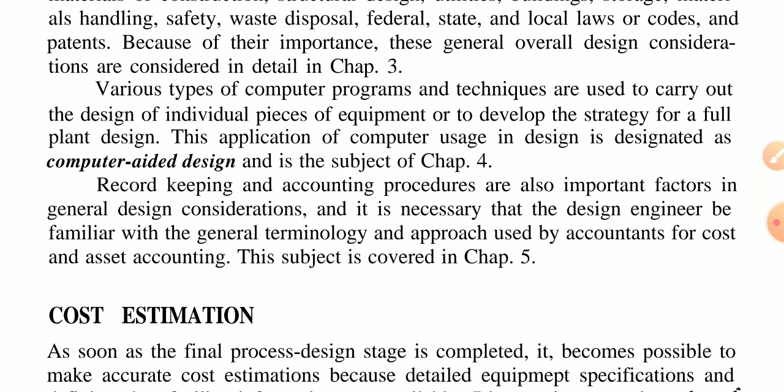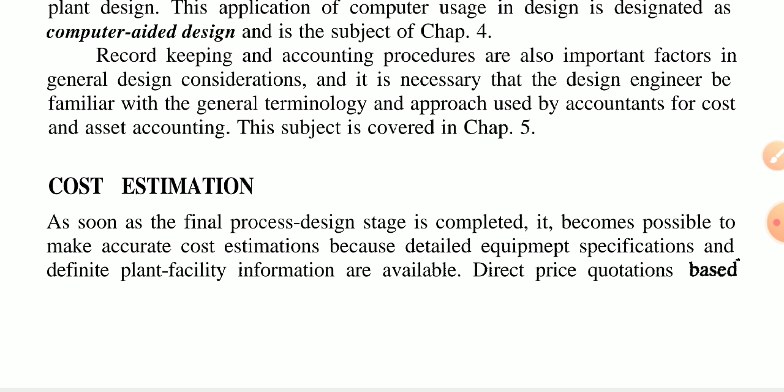Record keeping and accounting procedures are also important factors in general design consideration, and it is necessary that the design engineer be familiar with the general terminology and approaches used by accountants for cost and asset accounting. This subject is covered in Chap. 5.

Now we will look at cost estimation. As soon as the final process design stage is completed, it becomes possible to make an accurate cost estimation, because detailed equipment specifications and definite plant facility information are available. Direct price quotations based on detailed specifications can be obtained from various manufacturers. However, as mentioned earlier, no design project should proceed to final stages without considering cost.

Such estimates should be capable of providing a basis for company management to decide if further capital should be invested in the project. The chemical engineer must be certain to consider all possible factors when making a cost analysis.

Fixed cost, direct production cost for raw materials, labor, maintenance, power and utilities must all be included along with cost for plant and administrative overhead distribution of the final product. We will see these different aspects.

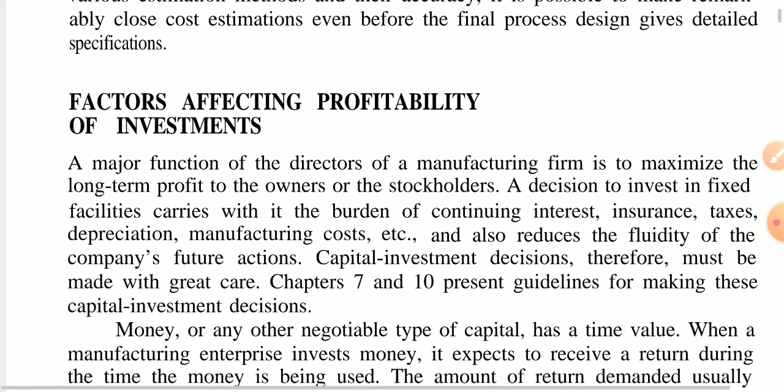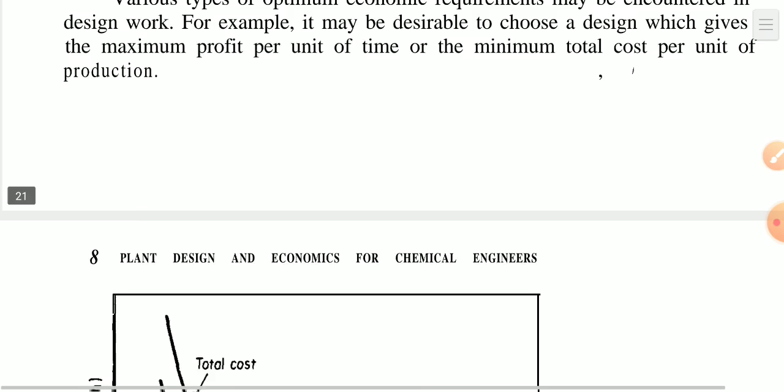ઓકે, આપણે વન બાય વન ડિસ્કસ કરતા જઈશું આપણે. પ્રેક્ટિકલ કન્સિડરેશન ડિઝાઇન.

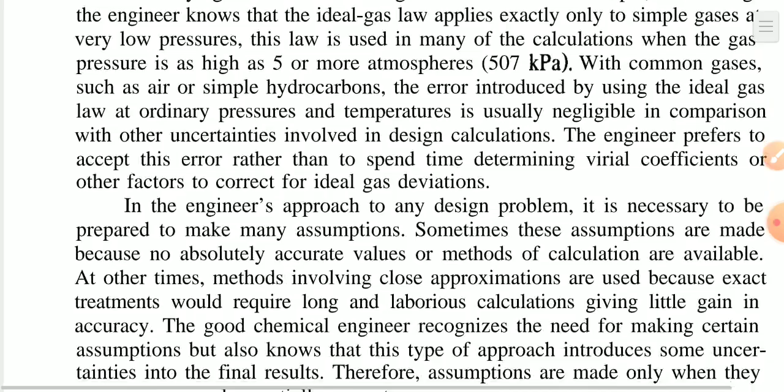ડિઝાઇન અપ્રોચીસ કઈ રીતે કરવાનું છે. એન્ડ ધ સેકન્ડ ચેપ્ટરમાં આવશે પ્રોસેસ ડિઝાઇન ડેવલપમેન્ટ, તમે કઈ રીતે ડેવલપ કરી શકો છો.

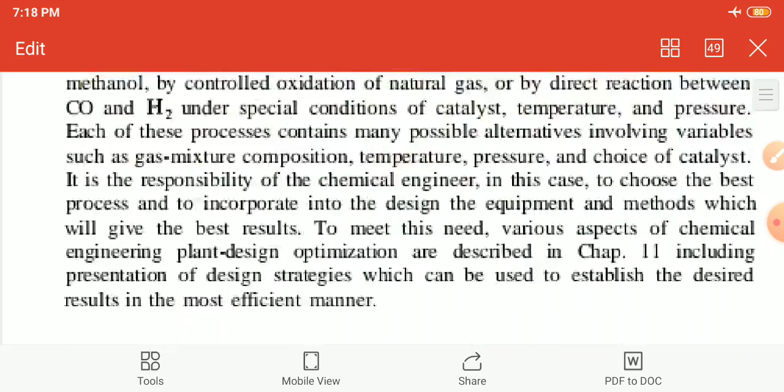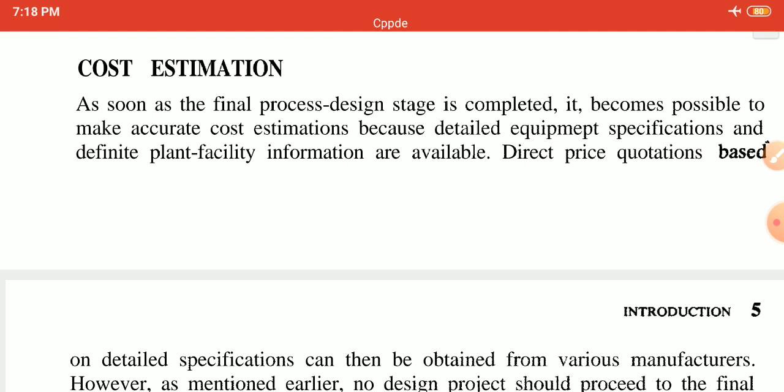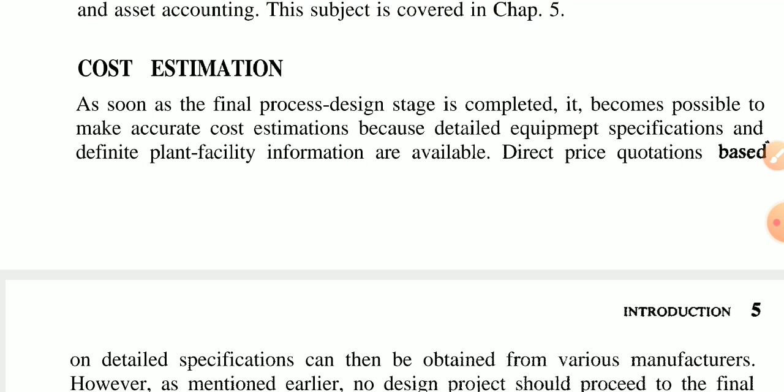સિમ્પલી આપણે કોસ્ટ એસ્ટિમેશન વિશે જોયું કે as soon as the final process-design stage is completed, it becomes possible to make an accurate cost estimation because detailed equipment specification sheet and definite plant facilities information are available. Direct price quotations based on the detailed specification can be obtained from various manufacturers. However, as I mentioned earlier, no design project should proceed to final stages before costs are considered.

Cost estimation should be made out at the early stages of the design when complete specifications are not available. Evaluation of the cost in the preliminary phase is sometimes called guesstimation, but the appropriate designation is pre-design cost estimation. Such estimates should be capable of providing a basis for company management to decide if further capital should be invested in the project.

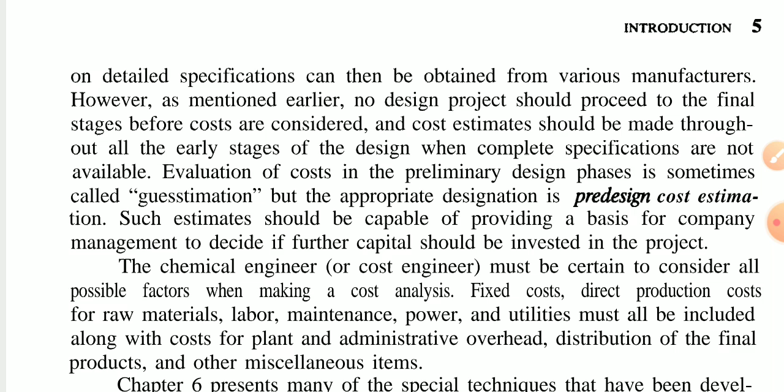Now, the chemical engineer must be certain to consider all possible factors when making a cost analysis. Fixed cost, direct production cost for raw materials, labor, maintenance, power and utilities must all be included along with the cost for plant and administrative distribution of the final products. Miscellaneous items - આપણે અલગ અલગ રીતે જોઈશું.

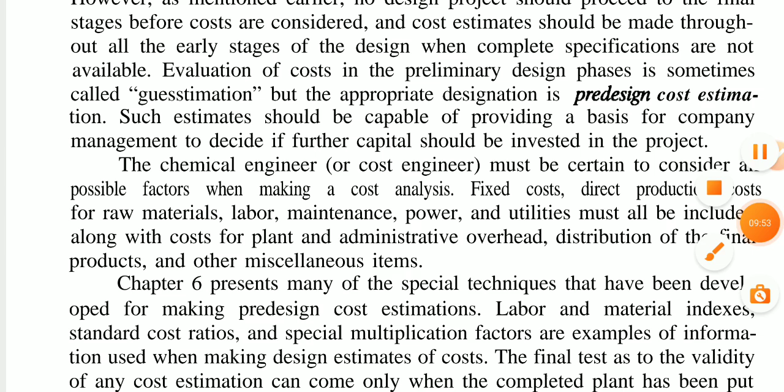આ કોસ્ટ એસ્ટિમેશનનો પાર્ટ છે. And the detailed specification part can be obtained from various manufacturers. However, as I mentioned earlier, no design project should proceed to final stages before cost is considered.

The cost estimation should be made through this process. Any evaluation of cost in some phases is sometimes called guesstimation, but the appropriate designation is pre-design cost estimation. Such estimation is capable of providing a basis for any company management - આપણે કામકાજ કરવાનું હોય એના બેઝિસ પર - to decide if further capital should be invested in this project.

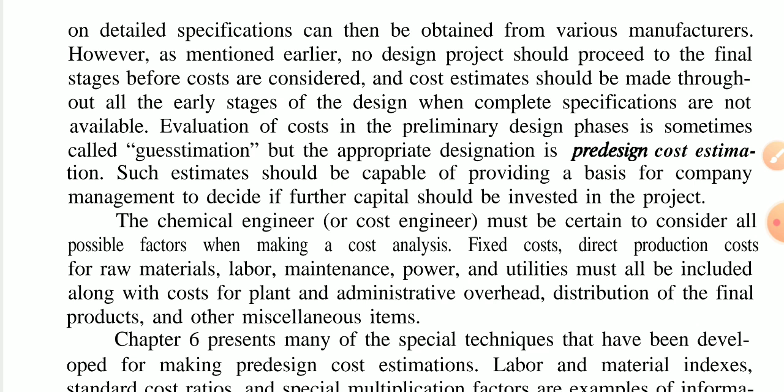The chemical engineer or cost engineer must be certain to consider all possible factors when making a cost analysis. Fixed cost, direct production cost - રો મટીરિયલના લેબર પાવર રિક્વાયરમેન્ટ કેટલો છે એ જોઈશું - along with plant and administrative overhead distribution of the final product and other miscellaneous items. Some special techniques have been developed for making pre-design cost estimation - labor and material indexes, standard cost ratio and special multiplication factors are some examples of information used in the design estimation cost.

And the final test of validity for any cost estimation comes only when the completed plant has been put into operation. If the design engineer is well acquainted with the various estimation methods and accuracy, it is possible to make a remarkably close cost estimation even before the final process.

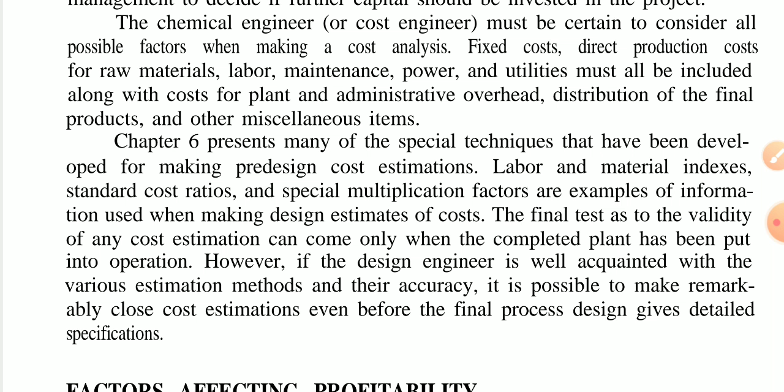ડિઝાઇન કે ડિટેલ સ્પેસિફિકેશન શીટ પર જોઈશું આપણે.

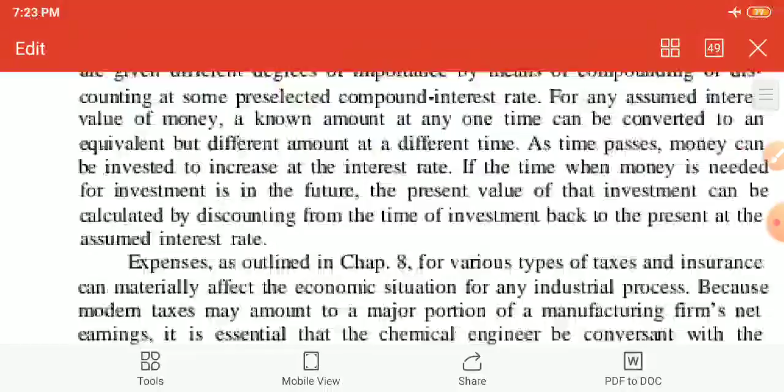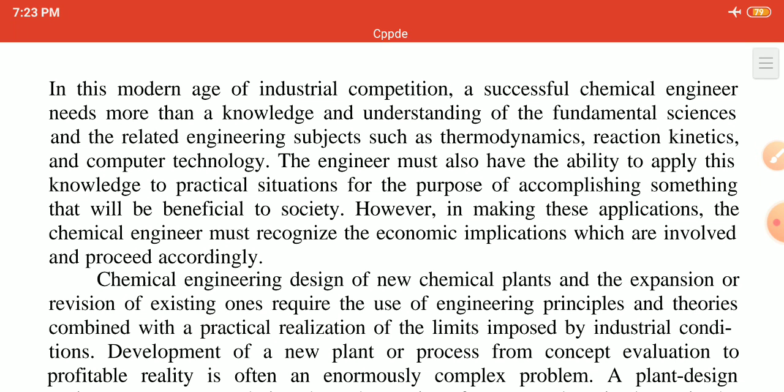શરૂઆતમાં આપણે જોઈ ગયા પ્રીવિયસ લેક્ચરમાં કે સિમ્પલ ડિસ્કશન પાર્ટ ઇન્ટ્રોડક્શનમાં કયા કયા પોઈન્ટ આવે. In this modern age of industrial competition, a successful chemical engineer needs more than knowledge and understanding of the fundamental sciences and related engineering subjects such as thermodynamics, reaction kinetics and computer technology - the ability to apply this knowledge to practical situations to accomplish something beneficial to society. However, in making these applications, the chemical engineer must recognize the economic implications involved and proceed accordingly.

કેમિકલ એન્જિનિયરિંગના પાર્ટમાં આપણે જોયું હતું કે expansion and revision of existing plants require the use of engineering principles અને સમ થિયરીઝ જોઈ ગયા હતા, combined with practical realization of the limits imposed by industrial conditions. Some development of a new plant or process from concept evaluation to profitable reality involves complex problems.

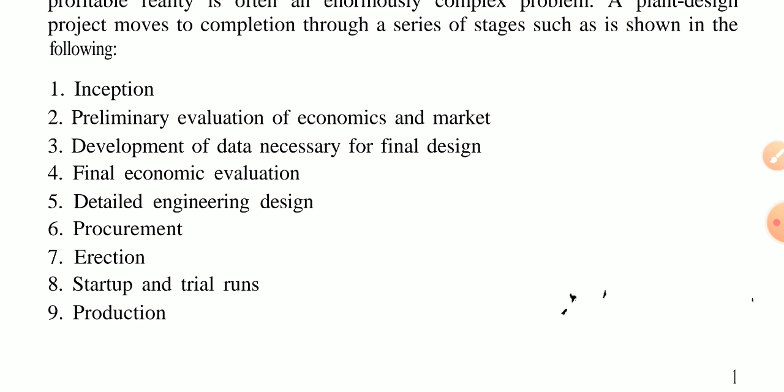ઓકે, પ્લાન્ટ ડિઝાઇન માટે ડિસ્કસ કરી ગયા હતા આપણે - પ્રોસેસ ડિઝાઇન ડેવલપમેન્ટ.

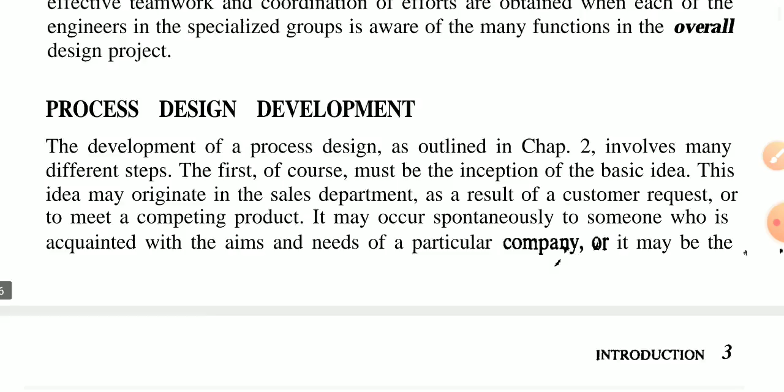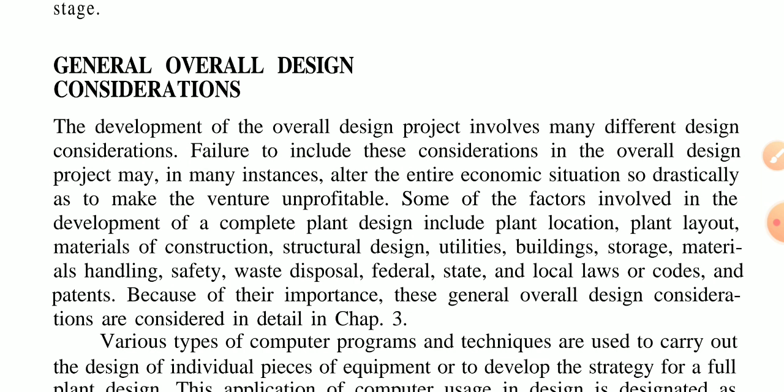ઓકે, જનરલ ડિઝાઇન બેઝ આપણે મોસ્ટલી જોઈ ગયા છીએ - the development of overall design project. Failure to include consideration of the overall design project, in many instances the entire economic situation. So this is the main point to mention, some of the factors involved in the development of a complete plant design. Okay, thank you.